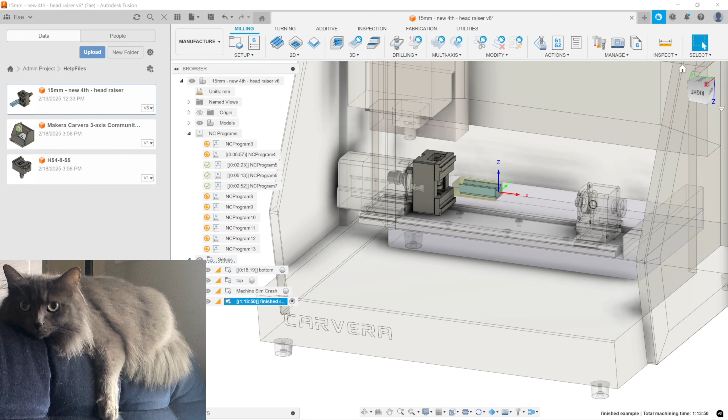So what we have going on today is one of the community members, Serge, who goes by the moniker Pew Pew Lasers on the Discord page, sent in a file with a fourth axis where they want to do a tool flip in the middle of it, and they wanted me to look at it and see if there's anything I could do to work through the file, give any notes, hints, tips, tricks. So I'm going to walk through this file start to finish, how I would potentially approach it, and go from there. Just maybe a little bit of background.

So the vise you see is this self-aligning vise. It's not the normal four-jaw chuck. And this is quite literally the first part I'm making using this vise. I made the adapter plate a couple weeks back. But the thinking I had was that this would enable the ability to do flip parts in, I guess, any material really quite easily with the fourth axis because it's center aligned. But in the process of putting this together, I realized there's a lot more caveats involved than I expected.

One of the things that worries me the most is how to work out the clearance between the vise and the spindle and all that part. I'm happy to have any kind of help on this one.

Talking about trying to figure out how to deal with a file where you want to know whether or not you're going to hit the vise. So I'm going to quickly simulate the file that I was sent and step through real quick.

So if Serge was working with a Carvera with the laser attachment, you can see all of these red areas, it would smash directly into them, which is not great. Luckily, Serge is not working with the laser attached, so I quickly added a second simulation file that has the laser removed.

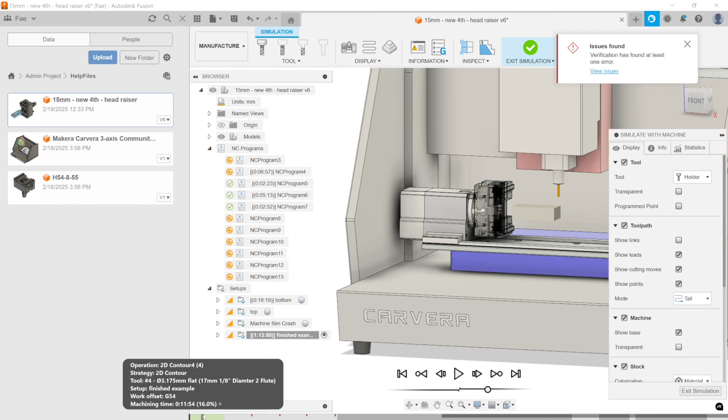And I will walk through exactly how to do that when I do the setup. But inside of here, you can see it still has a few areas where it could potentially crash, but we can fix those as time goes on.

So the first thing I'm going to talk through is I know that there is a crash happening. And the way I would potentially fix that crash is by taking the stock a little bit further away from the chuck. You could also fix it by using a slightly longer tool and a few different other ways.

So if I go into the design workspace, Serge has got this setup where there's the chuck and there's the part. So I'm going to part with the chuck and just pull it another 10 millimeters away. And I can check how long the part will need to be by clicking the inspect button and grabbing two sides. So it looks like you'd be looking for something around 87 to 90 millimeters of part with stick out.

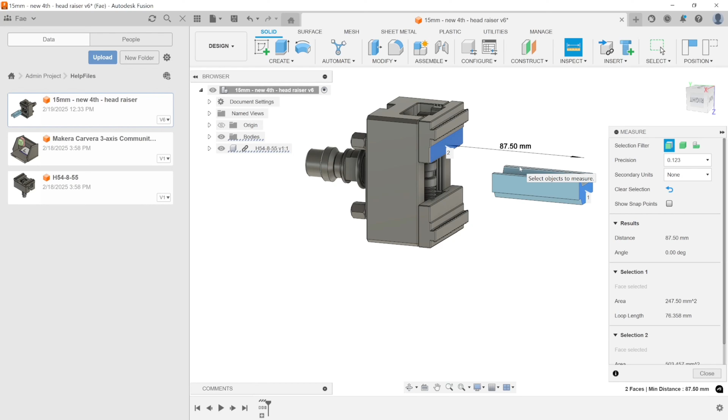Right. As you go through this, you would verify it a few different times with the machine simulation. So if I go back into the manufacture tab, regenerate the toolpath real quick.

I'm curious to hear your thoughts on where the optimal WCS, the work coordinate system, should be. Do you agree with using the most furthest point, or should I maybe use the chuck as the WCS origin?

So long as your part is at least as long as the piece that's in Fusion, it's probably better to use the end of the part just because it's easily accessible. Though it doesn't really matter so long as you set it up the same between Fusion and your machine.

So what we're talking about is in the setup, there's this work coordinate system here. That could have been anywhere along. So I'll talk through those as I do a new machine setup. Real quick, showing the simulate with machine.

Running through the entire simulation right now of the toolpaths that I had generated earlier. Shows me that there aren't any collisions. There's no little red nicks on the bottom bar. And the verification issues, no issues found, has shown up at the top, meaning I can be pretty confident.

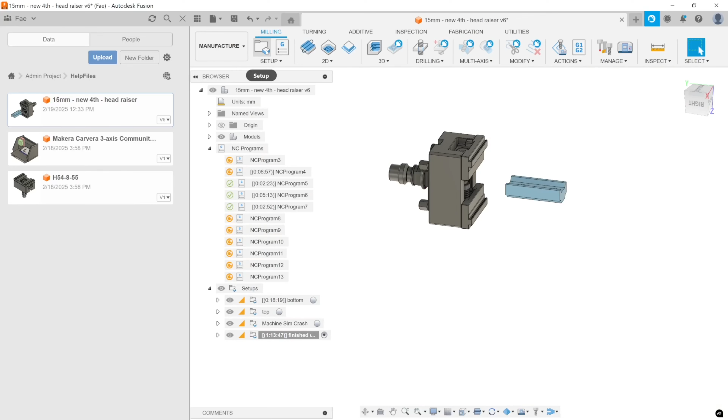Did you need to do anything special for the simulation to know that hitting the chuck would be a problem, or is that what you're about to show? We're going to walk through doing the setup from scratch. All right, so in the Manufacture tab, creating a new setup.

The machine is going to be the Carvera 4th axis harmonic community, no laser version. This is the version that I created that doesn't have the laser module attached. The operation is milling. For the work coordinate system.

I'm going to choose my work coordinate as z-axis and x-axis. So the first thing I select is my z-axis plane, which is any flat face to get the z-axis going up. Then I'm going to choose my x-axis. I want that going through the center of the part, so anywhere there's a line parallel to the center of the part, click on that line. You can see the x-axis is going through the part, but it is reversed.

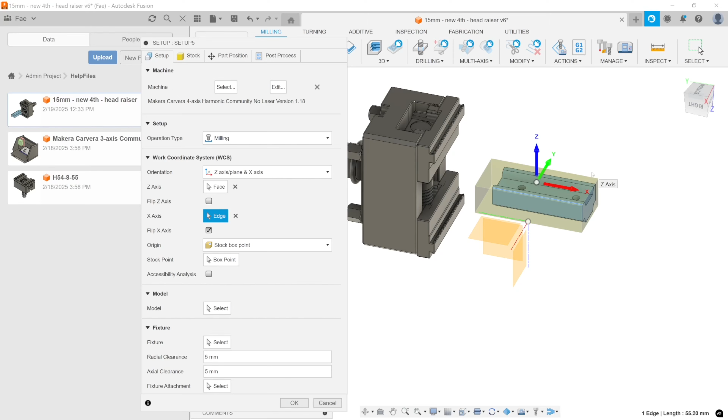So I'm going to flip the x-axis. Now I've got my coordinates correct: z-axis is up, y-axis is away from me, and x-axis is through the center of the part. Anytime you're doing 4th axis work, this is the setup you want to do. That way you can touch off on the top of the spindle like you would normally do with a 4th axis part, and the Z height will be correct.

Then we need to choose an origin point. Coming down to the origin section, you choose model origin, selected point, model box point, or stock box point. I'm going to start with stock box point and select. So I could choose the center of the part along this axis. I know from earlier in the setup in the design document that that center point is the central axis of the chuck and the central axis of the A-axis.

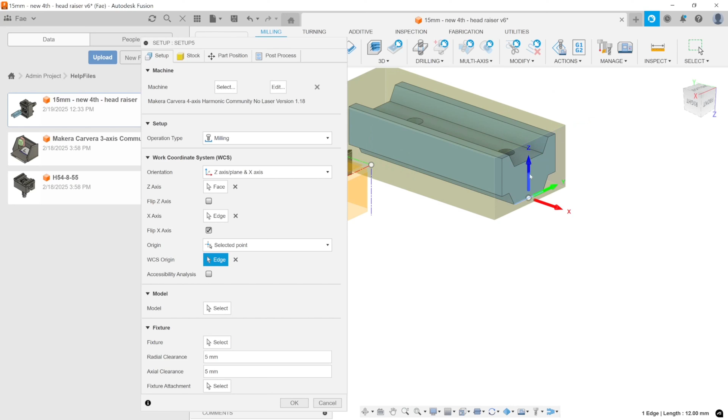However, if it weren't there, I could choose various different options. I could choose a model box point, which is on the physical object, any of the model pieces. So again, I could choose a center point right there, which is a center of all of the 3D files that I've got open right now. Or I could go to selected point, which gives me flexibility to put my origin anywhere. So if I were not doing a 4th axis part, I could put the origin on any of these faces, centering on faces, and so on and so forth.

Or I could set it up on this axis here. Or, if I were to ignore the warnings here, I'm going to go back into the Design tab and create a sketch on that face. I'm going to capture the position of the things I was doing earlier. So I've got a sketch here.

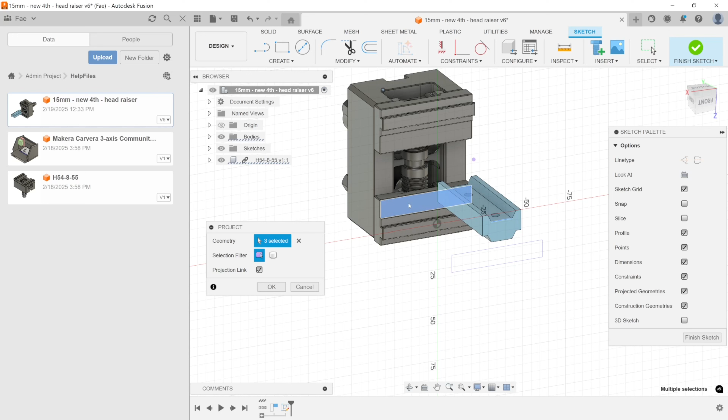I could project any of the geometry I want. Say I wanted to line up my origin with this top face here, I could project any point on that top face. Project is the P key. Then I could project this center line here. Don't want to select that. So then, if I grab a line from the midpoint up and constrain horizontal from that point to that point, now I know this is the central axis of that part, the end of the part at the height of the top of my vise.

Not super useful when you're doing a 4th axis part, but useful if you're doing a 3-axis part, say you're doing it inside a collet chuck or inside a vise. This allows you to manipulate exactly where that origin point is going to show up. So I have it drawn out in my sketch. I go to the Manufacture tab, back into my setup, and I could select my WCS origin as that point right there. That's cool.

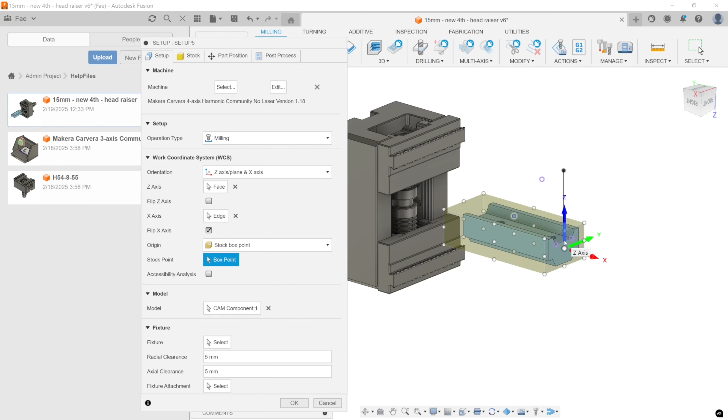It's a bit of an open-ended question. Could you imagine a scenario where you would want to do three-axis milling, but while the stock is held in the chuck in the rotary module? If you needed to pick up a specific feature on your fourth axis part that already existed as a Z0, so yeah.

Say I was milling on this face and the important part of what I was milling was in relation to that face. So I don't really care about the distance from the center line to the face. I care about the distance between this bottom face here and this top face here.

Then I would choose to do that style of three-axis milling.

Anytime you're doing work coordinate system points, those are what are called a datum. It's what you want to base all of your other measurements off of, and where accuracy matters from.

So in this particular case, if you had already milled these two central bore axes, you might choose to create a sketch that puts a point in the center of this bore along the central axis of the fourth axis, so that you could pick up on that bore using a three-axis probe, and then everything else would be based off of that.

It sounds like it would be really useful if you're modifying something that you didn't design yourself. Yeah, awesome. Thanks. That's actually the kind of project that I'm most likely to work on.

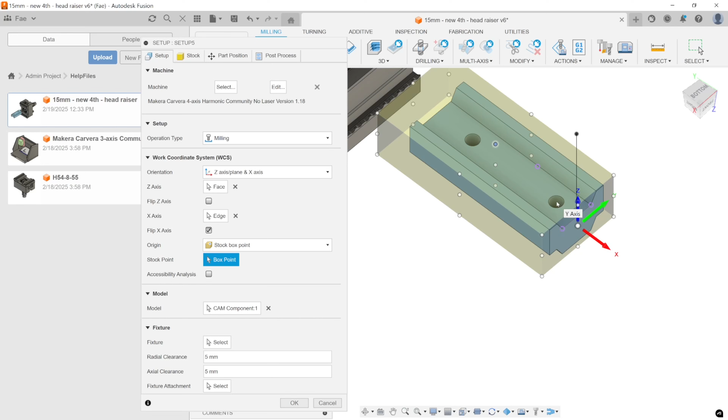Sweet. So we've chosen a point. I'm going to choose my model as just the model that I have out in the world right now. And to make sure that the simulation pays attention to the chuck, I'm going to set the chuck as a fixture.

That allows me to do some things like add some clearance to the fixture. So if I want to always stay 5 millimeters away from the chuck, or if I want to be super safe, say 10 millimeters away, I can add that information into this radial clearance or axial clearance, and that'll give me that information. So if I just select the parts of the chuck that matter, now when I do a machine simulation, it'll tell me if it hits that.

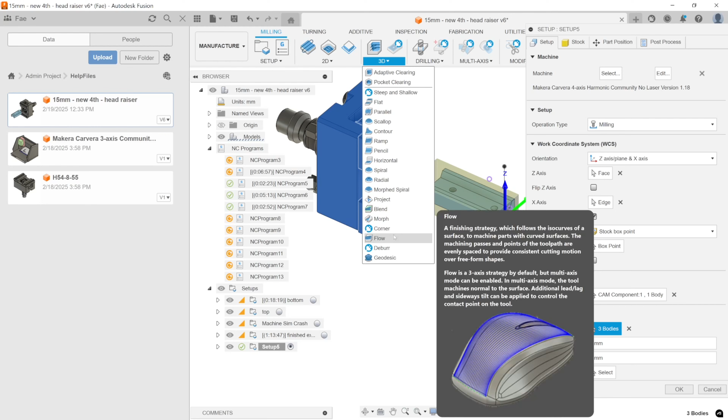And obviously, maybe not obvious, but does it know about hitting the machine itself? Like in the machine sim, there's that 3D representation of the Carvera. You would highlight that in red as well, right? Yeah, if in the machine simulation, anything in the fixture section, if it hits it, it will highlight it. But the 3D sections here, any of these model aware operations, won't try to mill what the vise is.

So if you had both the vise and the part in the model section, and you did a 3D adaptive clearing, and your stock covered both of them, then it would try to mill out this pocket in the vise, which it shouldn't do. So use fixtures for things that you don't want to mill into but still want to test if you're going to hit, and use models for the things you actually want to mill.

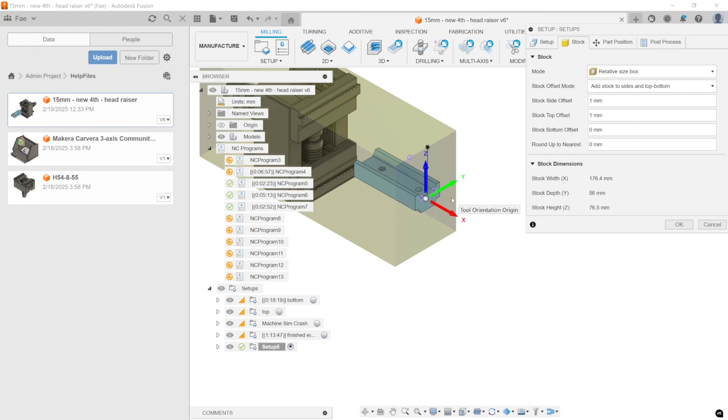Inside of stock, you had sent me some information about the piece of stock you were planning on using. But if you hadn't, you could use any type of stock, fixed size stock or relative size stock. I generally like using fixed size stock for anything where I know I've got a physical object I'm going to be machining out of. If I don't know what I'm going to be machining out of, I'll probably use relative size stock. So if I was cutting a small part out of a large sheet, I'd start off in relative size stock and say...

Oh, why are you doing that? Sorry, one second. There we go. I had clicked the wrong thing — if you saw the stock was covering the vise as well, I had clicked the wrong thing when I was in model. I had accidentally set it to everything instead of just the piece we're working on.

So if I'm not really sure what's going on, I'll often start with relative size stock and add stock to the sides, say 15 millimeters on each end, however I want to do it, and then switch back to fixed size. I'll take note of the measurements and switch back to fixed size stock. I just find fixed size stock is a little bit more robust over model changes, so I don't get into a situation where I change something in the model and suddenly things are different.

So you sent me some information which you had set up in the previous setup. I actually always thought 'preceding setup' would also consider what milling operations have been done in the preceding setup, but it doesn't seem to do that.

It just takes a side, right? That is this button right here, Continue Rest Machining. We'll do this when we go to side 2, so I can show you. It depends on exactly what I'm doing. If I'm going to use Continue Rest Machining, frequently I won't, just because it adds a bunch of extra processing time. But it's good to have for things like milling all 4 sides of something—Continue Rest Machining is super useful.

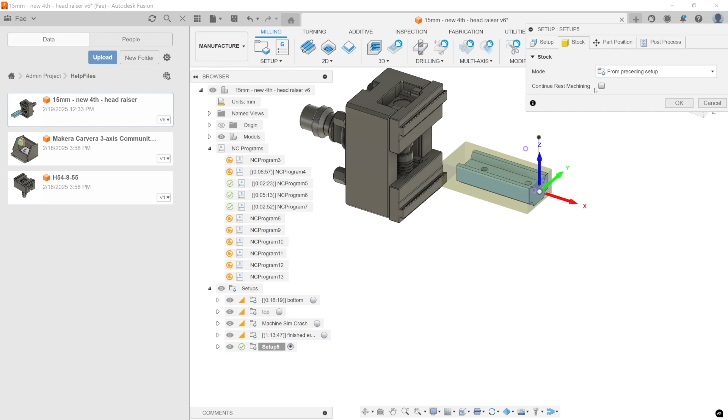Yeah, in this particular case, you want this side of the stock that's going into the vice jaws to be relatively square, just so that it sticks out and isn't terribly angled. However, with what you're doing with this piece, you've got a lot of leeway on either side that can be cut down.

So you can be less accurate with parts if you're going to work on them from scratch and remove the face. If you're going to remove parts from all 4 faces of the model, there's not really a reason to spend a lot of time facing the stock beforehand, because you'll end up refacing it once it's in the 4th axis.

To me, this is another really strong argument for doing flip parts or smallish parts like this in the fourth axis, now that it can hold the torque. You don't need to prepare the stock basically—as long as it's straight enough, just chuck it in.

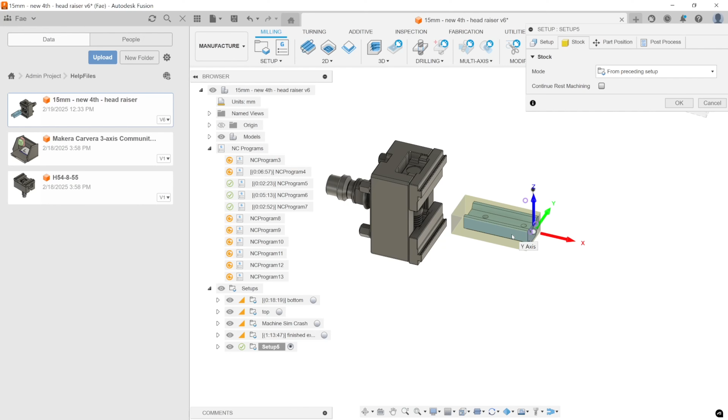Yeah, correct. All right, let's set up some machine simulation real quick. Since we are using one of the files from the Carvera Community profiles—I'll put a link into the chat and into the description of the video—but since we're using one of these profiles, we're already set up for machine simulation. So all of the work required to set up machine simulation is done for us.

The machine is ready to go. It has all of the pieces move correctly. The only thing we have to do is tell the machine simulation where our part is in relation to the machine.

In that case, I know that in my machine sim for 4th axis, the part position is the center of that chuck. So I'm going to switch this to part attachment selected point, and grab something that is already on that x-axis. I know this chuck has a central piece right here already on the x-axis, so I already know it's going to spin around that point.

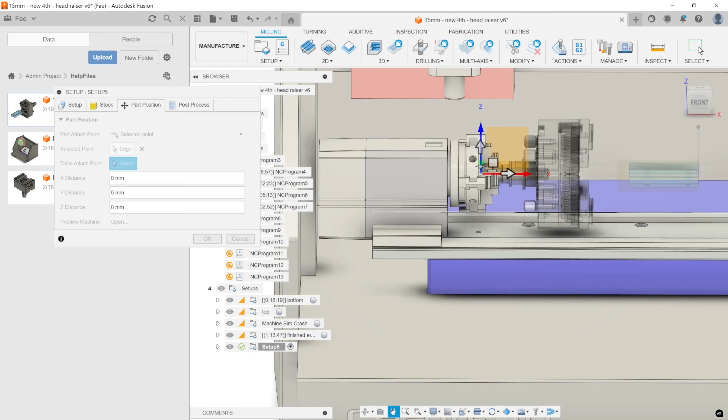Then I can drag it back and offset it away from the chuck however far I need to go. I'm not going to bother removing the chuck that's already on there—it's just more of a visual thing than anything that the chuck is there. So I've got my part in position, it's got its preview machine set up, and I have a part in the chuck. Hit OK.

And we have our setup. The stock is floating a little bit to the right. That's because you changed the stock size, or is that correct? The stock is floating off a bit to the right because I didn't modify the stock size to go all the way to the vice jaws.

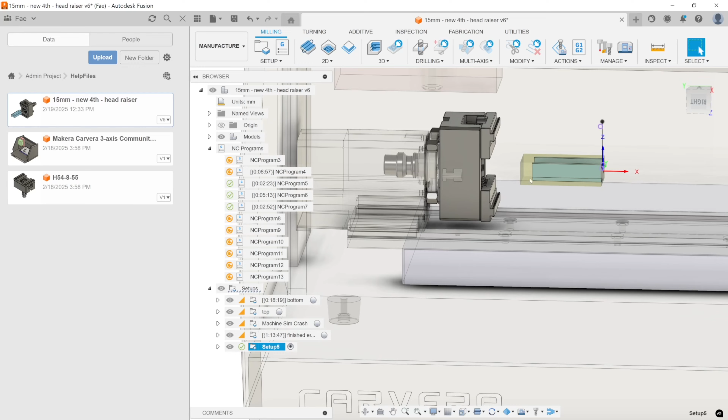Yep, that is more of a personal choice. I made the decision that I don't necessarily need to make the piece of stock go all the way into the vice jaws, since I'm only cutting this section of it.

Gotcha. And then I can test how long it should be, again with the inspect, grab the face it touches. It's about 95 millimeters apart, so on and so forth.

So first up, when we're working on a part, generally you want to rough and then finish. So we're going to start with some roughing operations. For visual clarity, I'm going to turn off this sketch real quick, and also get rid of that. Yeah, that's much better.

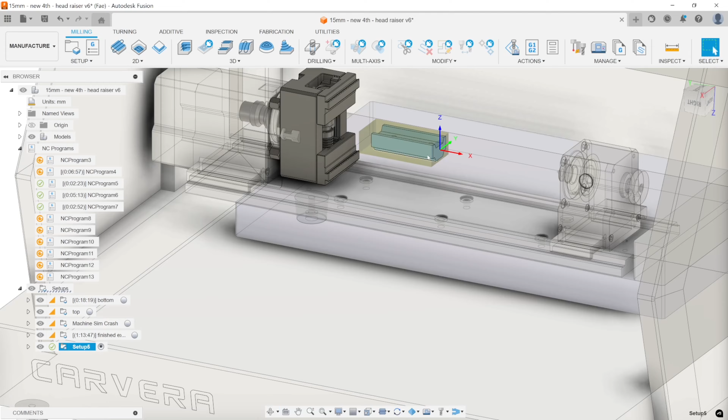A little bit more room to play around in. So as we're working, I like to generally use some form of adaptive clearing for most of my roughing operations, and there's a couple of ways we can go about this.

First thing you probably want to consider, or first thing you do when you do any roughing operation, is I'm going to start with an adaptive clearing. So I'm going to click the adaptive clearing, make sure my tool is correct—the tool you're using and sent was a 17 millimeter. It's the DLC coated 3 flute, correct? Yeah, it's 3 flute even though it says 2 flute. Yeah, so I'll go in and double click that.

I'm going to switch it to the feeds and speeds preset that you had created for deep aluminum. I'll walk through all of this in a second, but once you create a toolpath for the first time, the best thing to do is just hit OK, and that puts it into your setups.

And you chose 3D adaptive here. Is there a reason why you did that instead of 2D adaptive, or is that a personal preference or something? Yeah, so choosing which of these two I wanted to go with...

So I have a model where I've got some slanted sides. I want to create a little staircase section on the slanted sides so I can finish it later. I also want to rough the top of these faces here, and there's a lot of operations I want to get done at once.

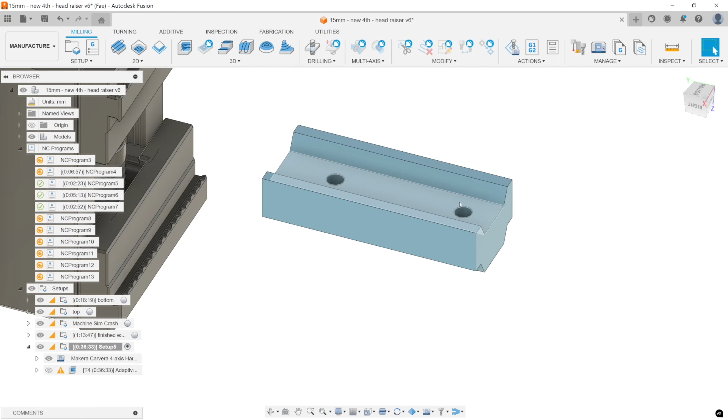I could go through and create 2D adaptive clearings for each of those operations. So I could do a 2D adaptive on this area here to clear out the center, and I could do another one to clear off the tops of these. But 2D adaptive doesn't really understand sloped surfaces, and there's some things I want to do with those sloped surfaces.

Awesome, that was going to be my next question—like a sloped surface and the cylindrical tool, how do you handle that? Yeah, so if we go back to what you had sent me, this is an example of if you were to do the 2D adaptive, and then your next toolpath, you see there's a varying amount of material being taken off across the entire surface.

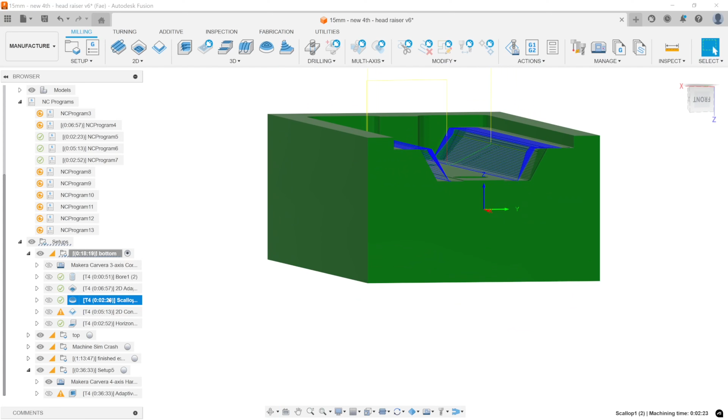So if I step here and then here, I'll simulate this real quick. If you had done a 2D adaptive, you step through and you can see it's got light cuts when it's at the top and heavy cuts when it's at the bottom for a finishing operation. You want to avoid taking heavy cuts when you're doing a finishing operation, and you want to avoid cuts that are inconsistent.

So you want to get as close to the same width of cut, width of material, on both the XY plane and the Z plane when you're doing a finishing operation. I'll go over that a bit more as we step through.

So in this particular case, I chose a 3D adaptive. I hit OK—this is a hot mess. I'm going to start refining this toolpath. But since I had already set it up and hit OK, I can just go back and forth with OK. I can go in, edit something, hit OK, see it, and if I don't like it, hit Control Z.

Whereas if I had gone into a 3D adaptive, and then went through, grabbed this, came into here, did a bunch of stuff in here, came into the linking tab, did a bunch of stuff in here, and accidentally hit escape, all of the work I had done before I hit escape would be completely lost. So it's always good to make the toolpath, hit OK, and then go in and edit it—you can edit it in steps.

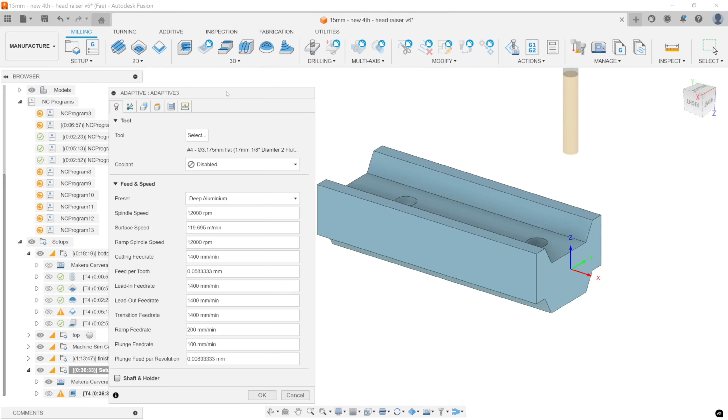I thought about this as well, and I can show how to do that. Don't you need the Fusion subscription to be able to do tool orientation? That's a paid feature you don't get on the free edition. You are required to use tool orientation to do it in the same setup, but I'll show you how to do it in a different setup, so you don't have to use the paid feature. I'll show you two ways: one vertical way, and a more complicated way that doesn't use the paid version. I can also show you a third way that does use the paid version, though it's not really much different from the free version.

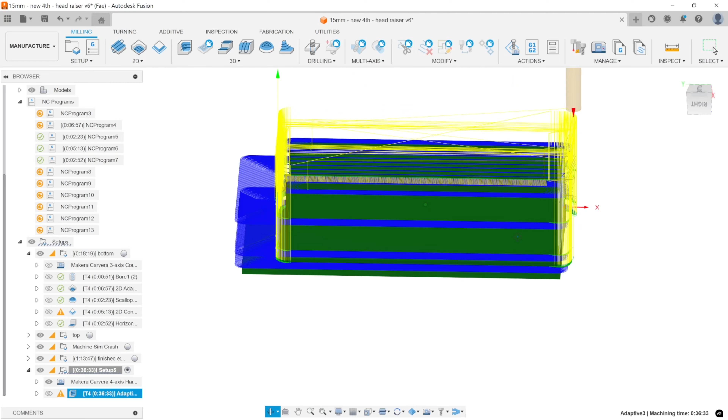All right, there was another question about heavy cuts in the simulation. No, not in the simulation - in the toolpath preview. I believe blue is just normal toolpaths, and yellow is like rapid moves. In this preview, blue means the tool is in the part and cutting. Yellow is a transitional move - you can see it going up and then over, and anytime it's touching the part, it's blue. Red is a linking move, usually a helix linking move or a ramp linking move.

If I set this up real quick, you can see the red showing a ramp into the piece. Fusion doesn't have a good way of showing how wide of a cut is being taken. Green is also a transition, but it's another type of linking move - green is what's called a lead-in or lead-out. If I go to the linking tab, there's a leads and transitions section - that's what these moves are. So it's either right when it's entering the piece, or right when it's leaving the piece to go into one of the yellow rapid moves.

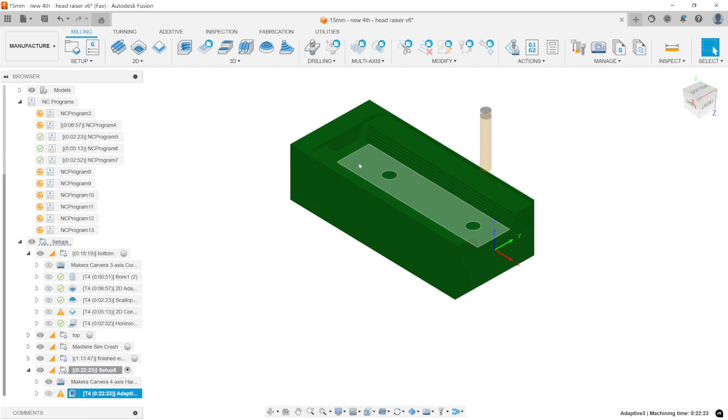So I've got a setup here, and I'm going to do a few things to it. First off, I'm going to hit F7, which hides the toolpath preview I've got going. Any visibility things you want to play around with are in the bottom section - there's all sorts of different options. You can turn on and off linking moves, so you can see yellow, green for lead-ins, and blue for cutting moves, plus a bunch more information. It's also on a hotkey, F7, to turn it on and off. It's nice to see what the in-process stock looks like, though I wouldn't trust this green version for your final representation - I always simulate to see what the final look actually looks like.

All right, let's start walking into these parts. Opening this up, the feeds and speeds - let's test this real quick. Yeah, these are the feeds and speeds you sent with the original file. I'm not as familiar with this tool, and it seems like you've been having pretty good luck with them, right? To be honest, I think I've tweaked a lot of that since putting in the motor controller, so we can just ignore the feeds and speeds for now, I suppose.

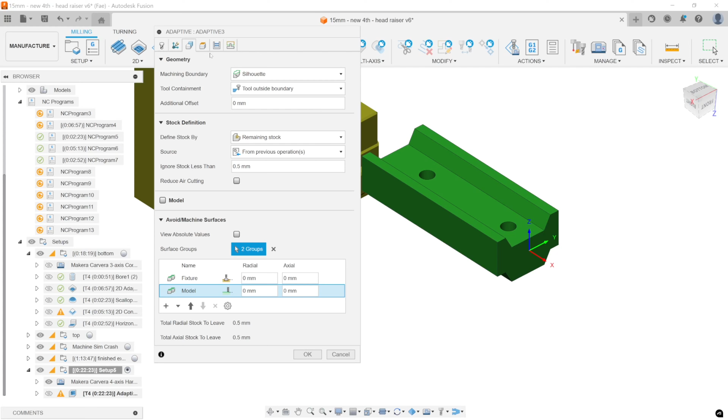Cool, then I'm just going to talk about toolpath generation for right now, and you can go back and modify feeds and speeds as you get more used to it. In my part, I'm going to jump into the Geometry tab. If you were in the 2D area, this is where you'd decide you want to cut this section of the part. In the 3D section, instead, with 2D you want to cut out a specific pocket - 3D is you want to cut out this area of the part. 3D is defining what you're not cutting, while 2D is defining exactly what you are cutting. 3D is a lot more automatic and can do more powerful things, but frequently you'll go back to 2D for things where you really need specificity, like one specific thing in a particular toolpath.

Awesome, so stepping through this, in the geometry section I'm going to choose a machining boundary. If I set this to none, it'll cut all of the stock - anywhere there's stock, it'll cut. If I instead set it to bounding box, it'll look at my model from the direction the cutter's looking at it and draw a rectangle around it.

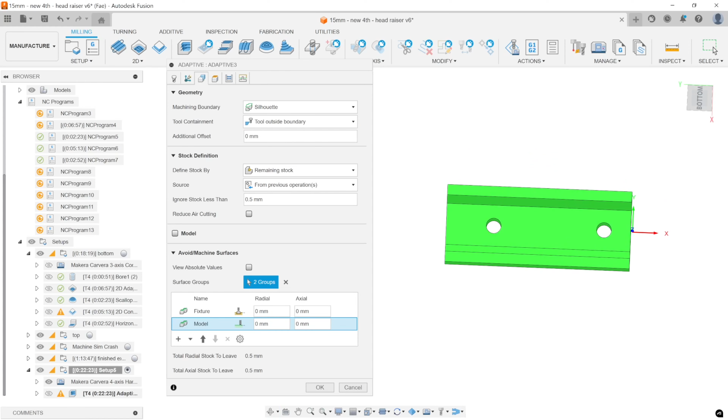I'm going to choose silhouette for this. The next section is how far outside of that silhouette do you want to go. The tool has dimensions itself. So if it's tool outside boundary, the tool will be able to go outside of that silhouette you've generated. Tool center on boundary, which is what it defaults to, and tool inside boundary are three different ways of defining exactly where the tool can and cannot go.

In this particular instance, I'm going to choose tool outside boundary. And because I've been doing a little bit of playing with the file, I'm going to add a little bit of extra offset. I'm doing that so that when I'm machining this face here, I go a little bit past it for the finishing operation, so that the finishing operation, when it gets to the end of the part, doesn't just plow into something. I'll show you that here in a second.

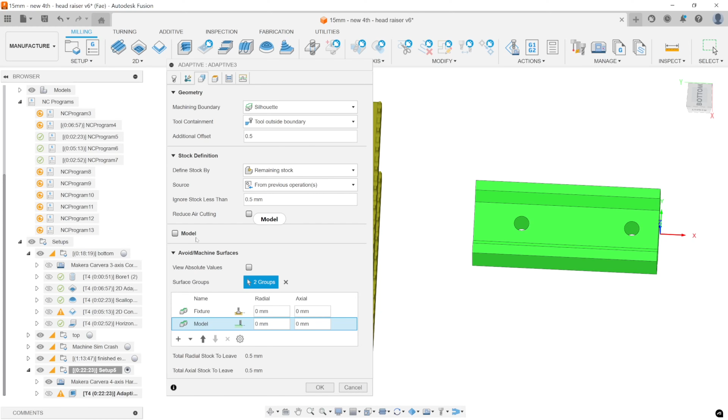Stock definition is all fine, since we don't have any operations before this. And that's good. There's some advanced things you can do with the avoid and machine surfaces, I'm not going to go over that right now. And there's some advanced things you could do with the model section, which I'm also not going to go over right now.

Next tab to jump into as we're walking through, I'm going to hit OK real quick so it saves all of the things I was just doing. It'll recalculate, but while it's recalculating, I can just double click it to cancel that recalculation.

Is the heights tab. This is telling it where do you want to cut from to on the z-axis. In this particular case, I don't want to cut below this face here because I want to create a tab on the left side. So instead of choosing model bottom for the bottom height, I'm going to switch this to selection and select that face.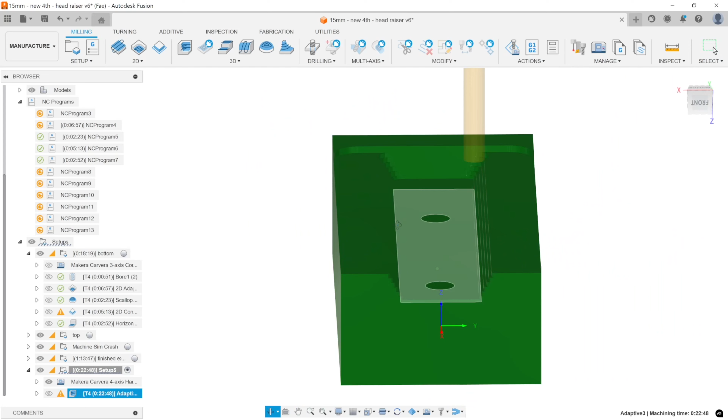I'm going to simulate this real quick just so you can see what's happening with that, or allow it to regenerate the toolpath. So if I pop out of F7 here, you can see I'm going past the part, but I'm leaving this little area here because I'm going to create a horizontal tab in the part right on this section. So I didn't want to get rid of that area. You can also see that I've gone past - let me turn the stock on and off. My part ends here and I go a little bit past it. This allows me when I'm doing the finishing operation to have a more consistent tool engagement. I can go off the surface.

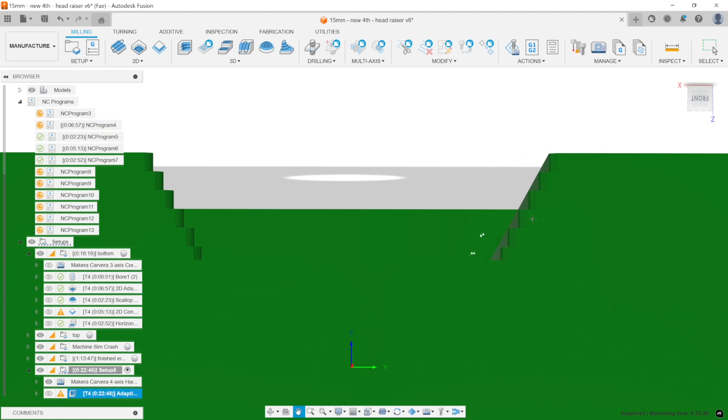And then the other advantage of the 3D toolpath is I have these stair steps, which is a much more consistent way of cutting when I do the finishing pass than if I were doing the earlier version where it was just cutting all the way up to the top surface when it was at the bottom. So it was cutting 6 millimeters when it was at the bottom and it was cutting 0.5 millimeter when it was at the top. Now when it's cutting the finishing toolpath, it's only cutting 0.5 millimeter every time it goes up. We can adjust that in the next tab. So right now this takes 22 minutes. In the passes tab,

We can adjust some things. You have your optimal load, which is your step over.

Cutting radius, machine cavities, setting it to climb, roughing step down of 7, and then the fine step down. This is where you choose how big of stair steps it's making on those vertical surfaces. So if I were to switch this to 2 and hit OK, it should simulate a little bit faster, much faster. So now it's much bigger stair steps, but it went from 22 minutes to 6 minutes in the little timer that I've got here.

If you haven't seen how that timer works, go into your profile, preferences, manufacture, show operation machining time, and that will turn on your little timers down here.

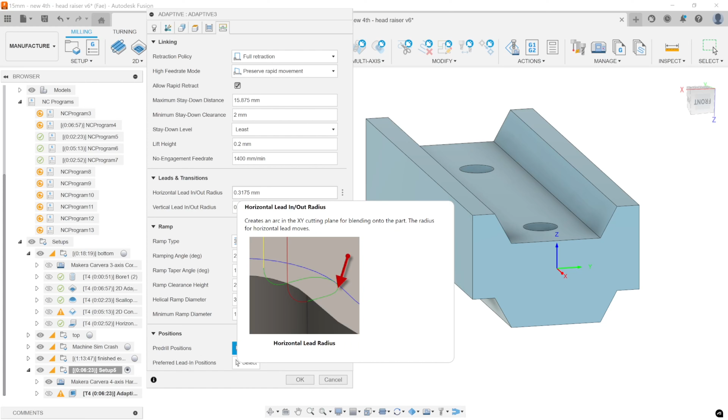Last up is the linking tab, and inside of here, the defaults are all fine. If you hover over any of them, it'll give you a little bit more of a breakdown. If anybody has any questions about any of them later on in the video, let me know — I'll be going over some of these features in different toolpaths as we go along.

So I hit OK, and it's going to generate my first toolpath. And there we go — going off the edge here, going off the edge here. If I do a quick simulate, it starts off the piece of stock, runs through the center of the stock, and then does the edges and the top.

Sorry, there was a question in chat: how do you decide how much retraction you need? Speedkill says they notice it appears to be a much larger default than is needed. Yeah, I think 5mm is default, which probably makes sense on a much larger VMC or larger mill than the Carvera. If I'm really optimizing something, I kind of change that to 1mm.

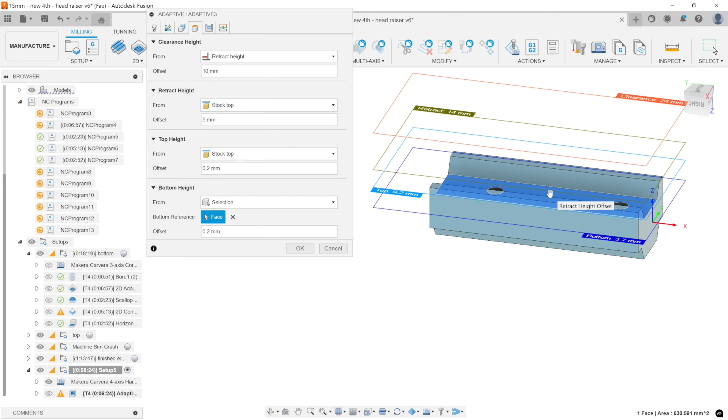Does it matter? If you're not confident in the part and you're okay sacrificing machining time for safety, leaving it at the default is great. If you're more confident in the part, and you know the top surface is already flat and the stock you're using isn't significantly taller than the stock you had set up in Fusion — if the stock in Fusion matches the stock you're actually putting into the machine — then you can go as low as 0.5 millimeter.

0.5 millimeter from stock top is about as far down as I would go on the first operation. Once you get into later operations where you've already milled away parts of it, you can get a bit more aggressive. In this particular part, my first roughing operation touches every top surface. Theoretically, when I'm done with this first operation, anywhere along the top is already cleared and no longer there to hit. So in my first operation, I might leave my retracts a little higher, 2-3 millimeters. But later, since I've verified that stock is gone in subsequent operations, I can reduce it.

That might be something to keep in mind if you're not preparing the stock yourself - it depends on the manufacturer. Same thing in the linking tab. We're not using a ramp here because we have the end of the part to work with, but if we were using a helix ramp, the ramp clearance height - if it's rough stock at the top, I'm going to leave that relatively high. But in the next operation, I'll show you bringing that down significantly.

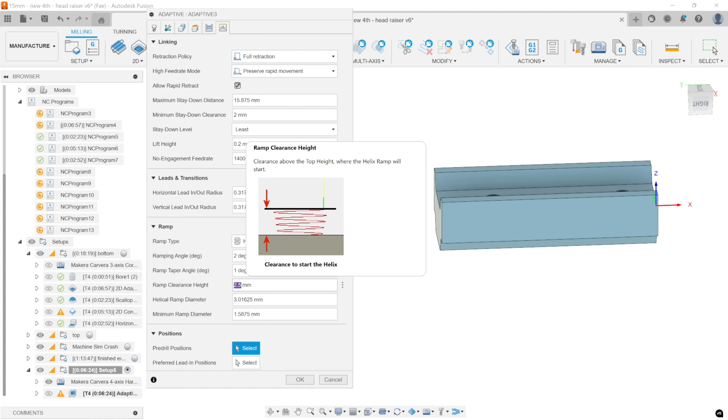So if I know I've already machined a surface and I'm just starting on this bore - actually let's do that. I've done op 1, let's do op 2. I'm going to do these bores real quick. I'll do a 2D bore operation, grab those two faces. Same tool, same speeds and feeds. Grab a bore operation, I've set it up, hit OK. Open it back up, that just makes sure it's saved.

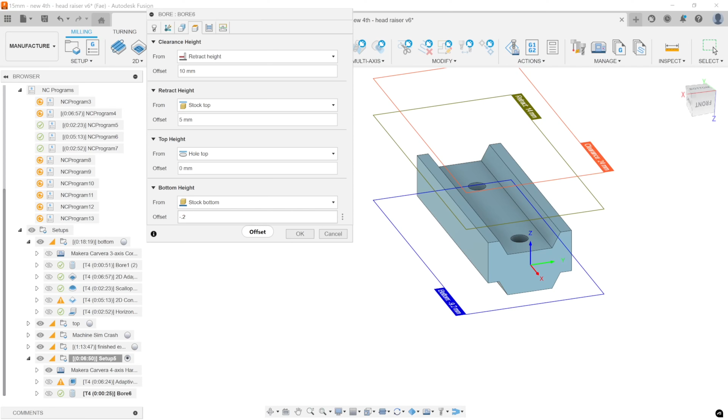So if I flip over the part, from one side I've punched that all the way through. This helps with any type of misalignment that might happen. If you need to flip the part and pick up something on the other side, it's good that you already have the bore. You could probe one bore, probe the other bore, make sure they're parallel. You could put a couple of pins in the bores, put a parallel against the two pins, and sweep it with an indicator to make sure those pins are parallel to your x-axis. There's a lot of useful things to having a feature transferred from one side to the other.

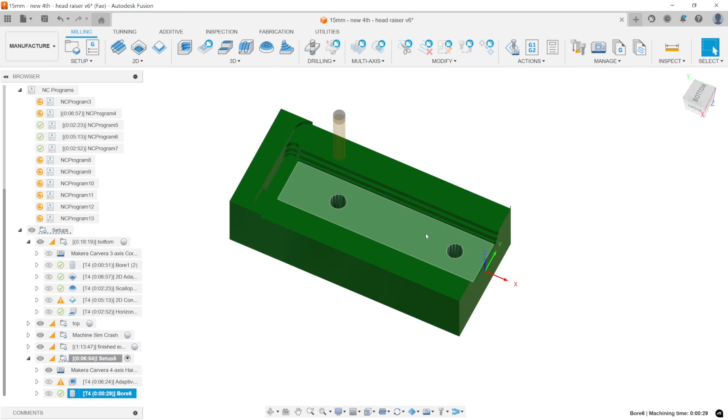It also leaves the bores much cleaner in this particular instance, since anytime you flip a part over there'll be a little bit of a ghost change in the tool cutting. So if you do the bore and flip it over, where those two bores meet, there'll be just a tiny visual step no matter what you do. If you do it from the same side, there won't be that step. You need to determine where that matters and where it doesn't. In this case, you can punch them all the way through - you might as well.

Going back into the heights tab - the hole top is fine. Since we already did this adaptive clear, I know this whole U-shaped section is already cut out. So I can start at the top of the hole and mill to the bottom. If I had not done the adaptive clear first and wanted to mill these two holes, I would choose stock top instead of hole top. So if I were to reverse this order and do the bore first...

As far as, in that process of roughing, maybe finishing, where would you normally do a bore? Because it seems like you can nearly do it - like you don't need to do any finishing operations on it, right? It's normally quite accurate, depending on how accurate you need the bore to be.

In this case, I suspect these bores are clearance bores for a piece of hardware - which means they can be done at any time. If these were bores that required me to put a pin in them, and that pin has to fit exactly, or I needed to press fit a pin into them, then I would do them in two operations: one is roughing the bore, and one is finishing the bore. That way I can tune the finishing to whatever I need it to be.

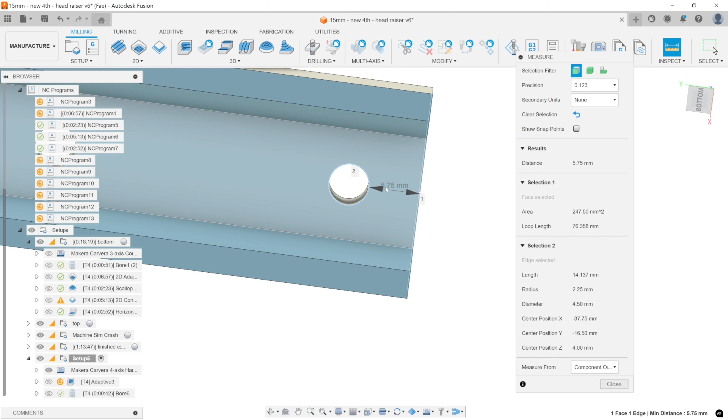Easy. Yeah, the inspect tool is super powerful. You can also grab a circle and it'll tell you what your radius and diameter are. You can grab a bore and it'll tell you all sorts of different information. You can set it to show you inches if you care about inches, or if you're working in inches and you want to see millimeters at the same time. You can also grab any two faces and you can see from that point to that point is 5 3/4 millimeters.

Awesome. So in the bore, again, we're skipping over feeds and speeds because you've got a bit stronger of a grasp on this particular mill. So we've done geometry, we've done heights. Coming to the passes tab,

we're doing a bore, so we want to make sure we use a ramp angle. I like tuning down ramp angles a little bit when I'm using aluminum, between 1.2 and 1.7 degrees. It just gives it a little bit nicer of an entry and doesn't lose a lot of extra time. If you're noticing that it's cutting really happy at 1.5 degrees, it might be worth upping it for the different parts that you're using. Some end mills will do up to 2 degrees, some end mills will do 3 degrees.

This is me being conservative. Me being conservative is 1.2 degrees, and then if I know the mill and I know how it operates, I'll bump that up until it starts being mad at me, which is if it's starting to really slow down the motor.

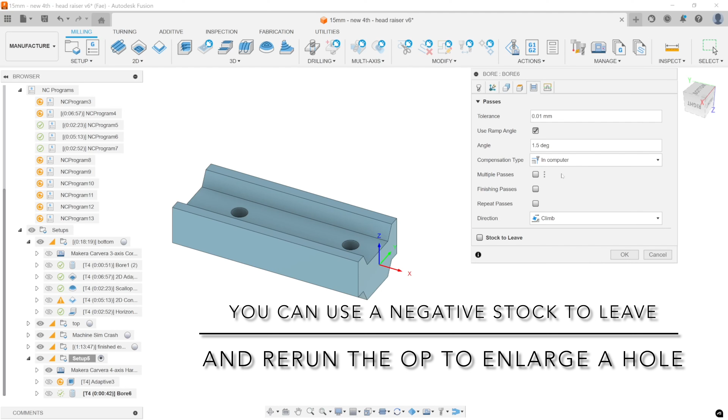Amazing. In this case, if I were doing a bore and I needed it to be more accurate and I needed to do a finish pass, you'd set the stock to leave to an amount, 0.1 millimeters is fine, and then you finish the bore in a second operation without stock to leave. But this is a clearance hole. The tolerances on the hole aren't super critical. It's large enough. Hit OK, and it jumps through and does the bore.

So we've done a couple of operations. This is sort of how you were setting up your file. There are a couple of operations you could consider. In this particular object, I know from how you've been setting it up that the sides and the front face don't seem terribly important as you were working through them. If they were, I would suggest going in and doing a 2D contour.

With an open chain to get like a U shape. Same tool, grab a chain, grab open chain. I'm going to select that edge and that edge to get the U shape. See, it's going around three of the sides, but not all of the sides. I'm going to hit OK on that. You can see it's making our U shape.

And then the heights, I'm going to do the height to selection, and select this bottom face here. And in this particular instance, you don't have the flute length to go all the way through. So instead, I'm going to go a little bit beneath this surface so that it's ready for finishing, and you could chamfer, but not all the way. So when you flip it, there will be a small step visible between those two.

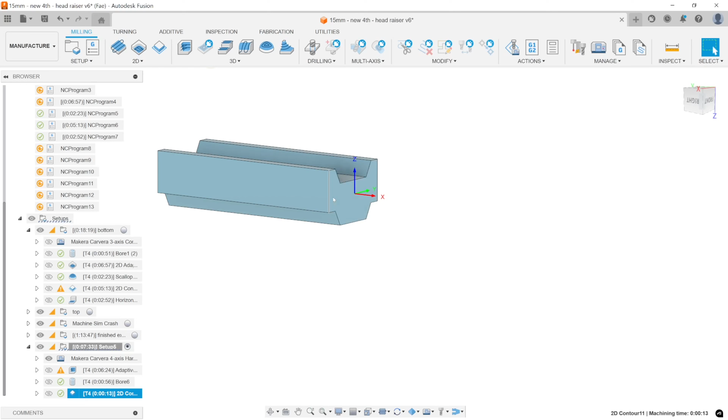Why are you being weird? There we go. So if we go into our 2D contour, when you are done finishing this part, there will be a small step, come here.

Okay, the lighting's being a bit weird. There'll be a small step between where the other side matches this side, but it's the outside of the part. You can burnish that away with some sandpaper and no one will be any wiser.

Really, what you're doing is you want to make sure that the important faces, which are this bottom face here, yeah, your important faces are these faces here. Everything else can be a little bit less accurate.

I think subsequent to sending you the file, what I found was I could do stock to leave on the outside on the first side, and then when I flip it over, there's enough flute length to do a finishing pass on the outside, doing that same kind of open chain, I think it's called. But there's just not enough flute length to do it all while it's got the full amount of stock.

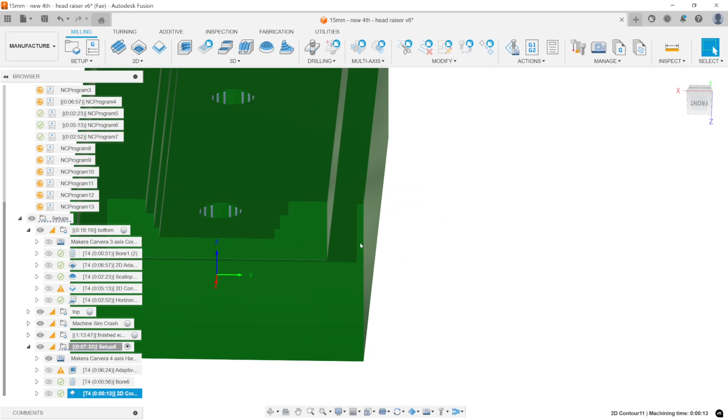A way to avoid that is you could go into the passes tab, turn on roughing passes, and have some step over. Should be 3.5, and then go into the linking tab and have a 1.5 degree ramp. This will take quite a while though.

And this is a good idea anyway, right? Because if you only did one, then the tool is touching both sides of the slot, which is not a happy place for the tool. It's nice to do a step over using the roughing passes because the first one that will happen is the one further away from the part, and that one will be touching both sides if it's a slot.

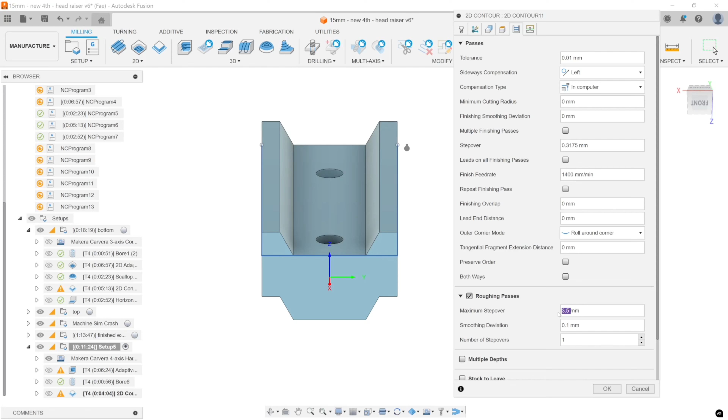But if it's not a slot, it won't be touching both sides. So I increased it a little bit more. I'd have to play with this for a little bit to get the exact value that you need to get rid of those sides. However, I have a different suggestion for how to clean up the sides of the part.

Instead of doing it in 2 operations, one from the top, one from the bottom, doing it in 4 operations where you do one from the top, one from the bottom, and then you just go through and clean up the 2 different sides as their own operations would give you a much better surface finish on these faces.

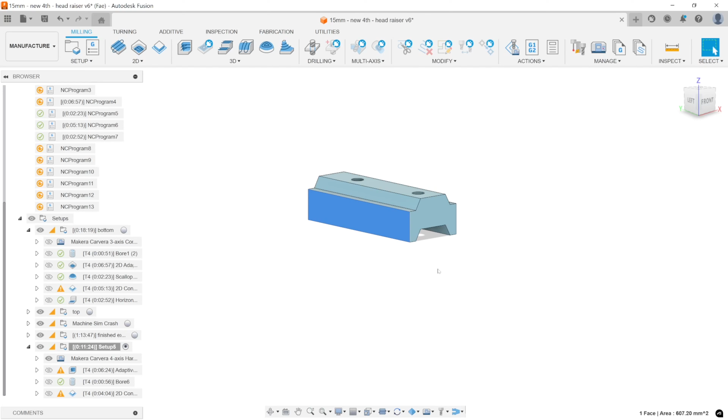And also be much quicker. The ramping down into the stock with the side of the end mill can take quite a bit of time. Yeah, that's because I think in the file that I have now on my computer, it's like 20 minutes just to do this U operation.

Since those then are just cleaning up a singular face, I'm not going to go over them. But it is, you set it up, you set your axes 90 degrees, and go from there. Yeah, I'm with you. And then the flute length also doesn't matter, so you don't need to worry about that either.

Correct. In terms of order of operations, going through the part, since it's on a 4th axis and you don't have to worry about flipping the part multiple times, I would honestly do all of the roughing operations first and then do all of the finishing operations. Oh, as in all the rough operations on all of the sides and then all of the finishing.

Yes. That way, a lot of extruded aluminums, as you're working with them, will tend to warp slightly when you remove large areas of stock. And it might be 0.05 or 0.1 millimeters. So long as it's within your amount of stock to leave before your finishing pass, you do all of your roughing, it warps slightly, and then you remove all of the warping that happened in the finishing pass.

It is one of the nice advantages of using a 4th axis for this instead of flipping the part. It's less noticeable on thicker parts and significantly more noticeable on thinner parts. If you have a 4 or 5 millimeter thick part or less, that thing will turn into a banana. If you heavily machine one side and you flip it over, it will be a banana.

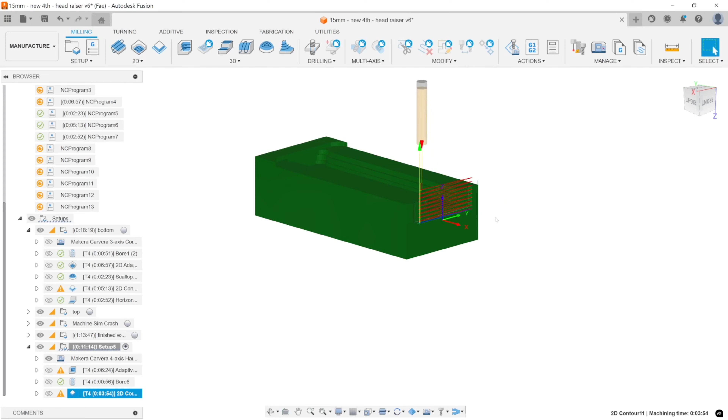Awesome. So, in this particular setup, if I were to modify this where you're going from the sides, I would still keep this side being cut from top and bottom, but then I would do the 2 other sides as just finishing from 90 degrees and then 270 degrees. Gotcha. All right.

So we've got that. I'm going to duplicate this toolpath really quick with a Control D, because we have roughed out most of the parts of this model now. The only thing we haven't roughed out is the tab.

If I was doing this in multiple operations, I would do all of the heavy roughing, roughing out this pocket, roughing out all of the 4 sides, then I would go back and rough out the tab.

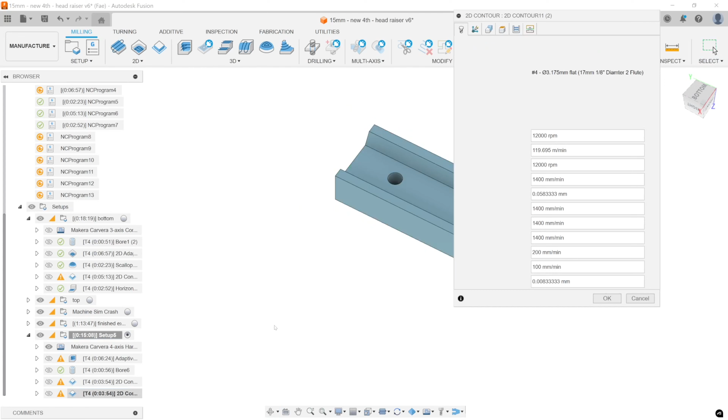The easiest way to do the tab is to go into the geometry, make a new open chain selection of this face here. And then we're going to lengthen it out a bit so it goes past the end of the model.

I'm going to add... 3 millimeters on either, let's do 5. I'm going to add 5 millimeters on either side.

So what happens, again, we've got our ramp from earlier with our 1.5 degree ramp, and we have our roughing passes with our step down. You don't necessarily need the roughing passes with the step down with this type of ramp, but it's good to keep them for a nicer finish. And our heights are, we're going just beneath the surface.

So it'll come in and create a nice happy little slot here.

When we do this from the other side, we're going to go in, leave another smaller slot, and then as the final operation, thin out the slot.

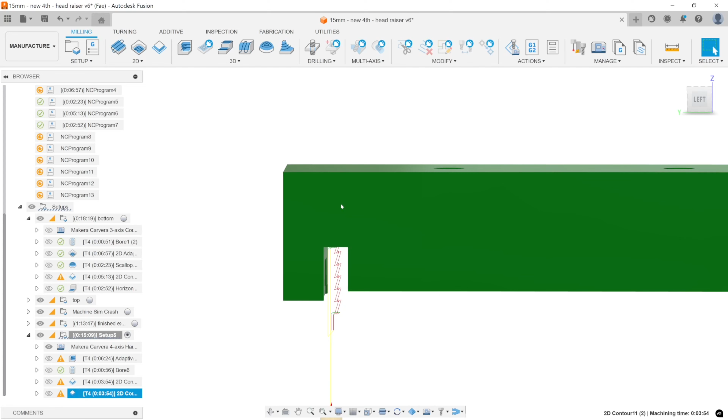I'll explain why when we do a few of the operations on the other side, but we're not going to repeat all of the operations on the other side.

So we've got to the point where we're ready to finish. We did our adaptive to rough things out, we did our bore to get the holes, 2D contour to clean up this face, 2D contour to rough in the slot while still maintaining a good amount of material.

And then for finishing, I want to finish these flat faces first, mostly because this corner here goes down into that flat face.

So if I want to finish the flat faces, I'm going to use the 3D toolpath flat. So I've made a flat, I've selected my tool, hit OK and see what it does. And honestly, in this particular instance, it's doing pretty good.

I'm going to start off with clicking machine over holes. That will make sure that when it's doing the flat on the bottom, it just goes straight over where your two bores are. That's a nice feature to add in, because if you don't do that, there might be a small amount of flashing around that hole, or it might try to toolpath around that hole, which can be kind of annoying.

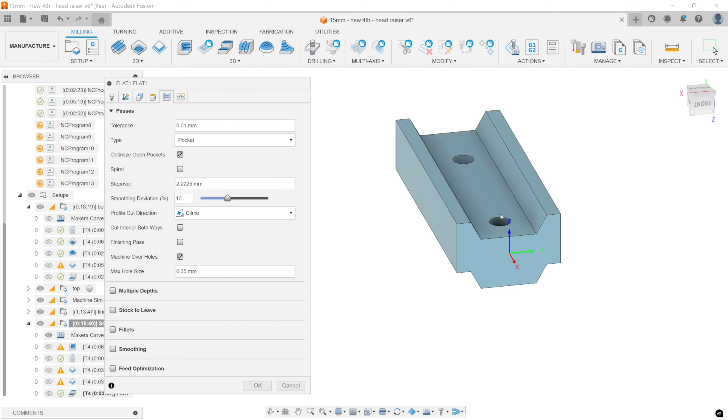So if you see with the stock, I'm going to turn things, grab this and highlight this edge. You can see that the areas that are scalloped are outside the face, so we don't need to worry about them.

So it's cleaned up this edge, it's cleaned up this edge. We have a little bit of flashing that's sticking up. We'll take care of that with our finishing pass on this flat face. But that covers cleaning up those different edges. And you see earlier it was moving around these holes, and now it's going straight over them. It's quicker, it's more efficient, and it leaves a better finish. When you get done, there'll be a slight striping pattern across the bottom instead of a chaotic mess.

Then let's talk about finishing the last face that's going to happen in this particular part, and that's these angled faces. There are a number of ways of doing this. The way that you'd want, which is to grab either a scallop or a contour toolpath, 3D scallop or 3D contour. I'm going to use the 3D scallop, or the 3D contour.

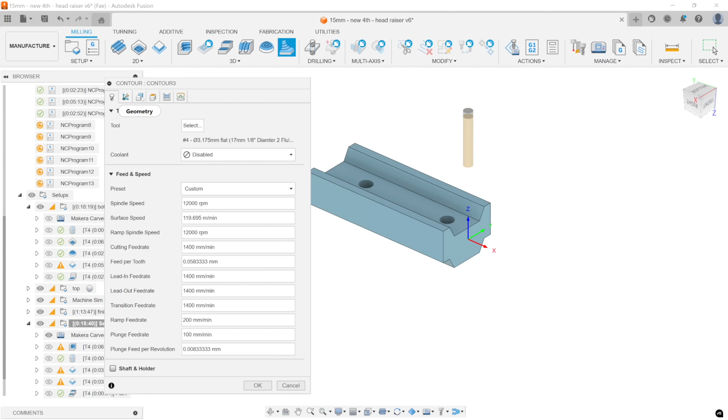In the geometry tab, switch to selection. No, not silhouette, selection. Thank you. Grab those two faces. And then I'm going to add a couple of different features.

I'm going to switch to tool center, on boundary is fine. We don't need to worry about contact boundary because we're using a flat tool right now. And the rest of this is fine.

This isn't necessarily the way I would do it, so I'm just going to show you what it looks like at its base level. In the passes tab, I need to set the maximum step down to like 0.2. So when you're doing a contour, this is the stair stepping that you get.

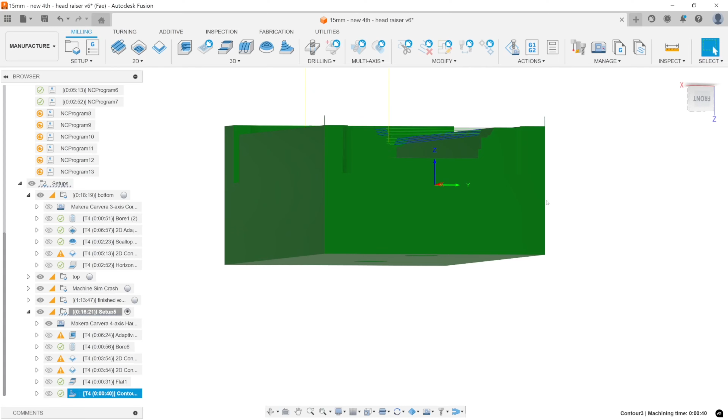So you see it's got a stair step. If I shut off the toolpath and get real close up to the part, anytime you use a flat end mill doing a contour like this, you're always going to get a stair stepped pattern. You can run your fingernail over it, it makes a lovely noise.

An alternative to using a flat bottomed end mill is if you instead go into your toolpath and select a different type of tool. I'm going to grab a ball end mill, ignoring feeds and speeds real quick. So I've got a ball end mill.

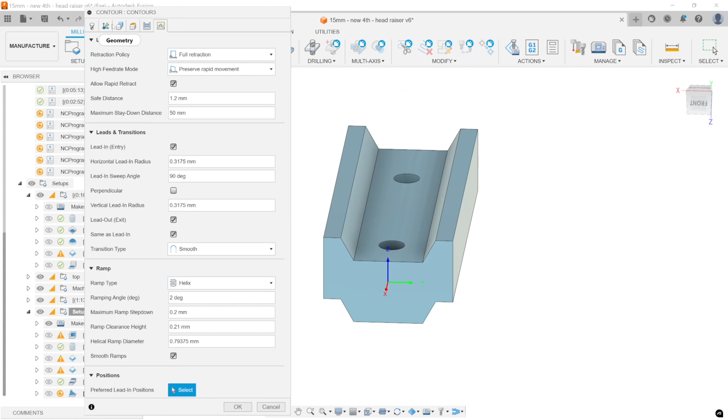It's all of the same selections. However, I am going to go into geometry and turn on contact point boundary. It's not super important for this because it is not an overhang, but anytime I'm using a ball end mill on a slanted surface, I like turning contact point boundary on. If you hover over it, it gives you a little bit of an informational dump about what's going on with the tool, on why it works and why it doesn't work. More or less, it just makes a nicer toolpath with ball end mills to have contact point boundary on.

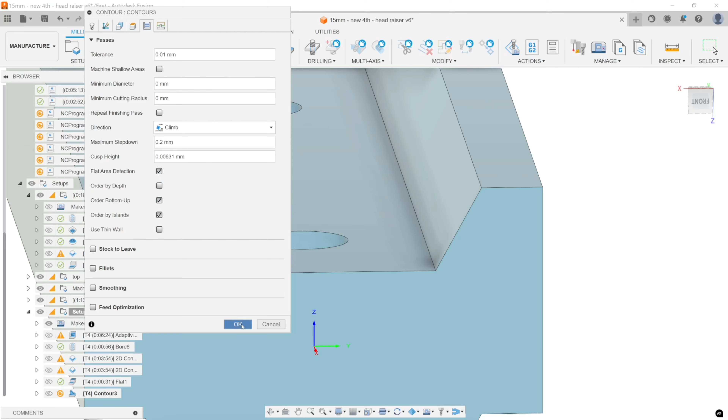The other option I'm going to change is in the passes tab. Since I'm using a ball end mill, I don't want to be cutting with the bottom of my ball end mill, so I'm going to order from bottom up instead of from top down. Because at the bottom of an end mill, it's basically like 0 RPM, right? It's the worst point of the tool. But if you pop into the simulation, you can see it is cutting with the side of the ball of the end mill, not the very bottom. As you're going from the bottom up, the bottom is almost always clear of material, except at the very, very bottom of the part.

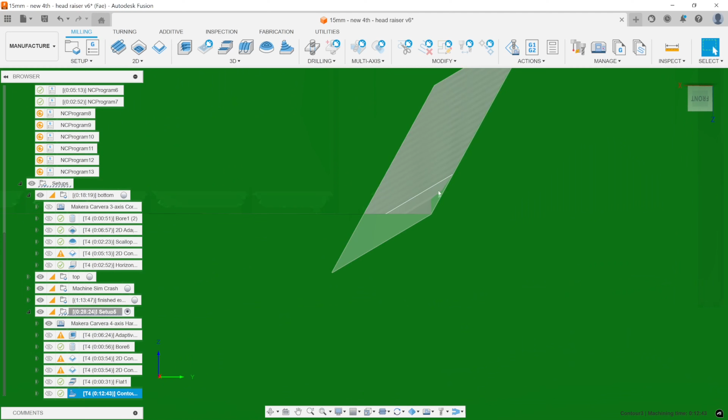So that's why I choose that. The other thing that comes up as a problem with this particular toolpath is since we're using a ball, we cannot get into this sharp corner. That might not be a big deal, depending on if you have large chamfers on the mating part that this goes into, if the chamfer is large enough to miss this section of the part. So if this here was mating into a part which looked like this, having the ball end mill not hit the corner is no big deal. If it was a tighter corner, it would be a problem. Anytime you have a sharp corner transition in any material, you want to relieve one or both sides.

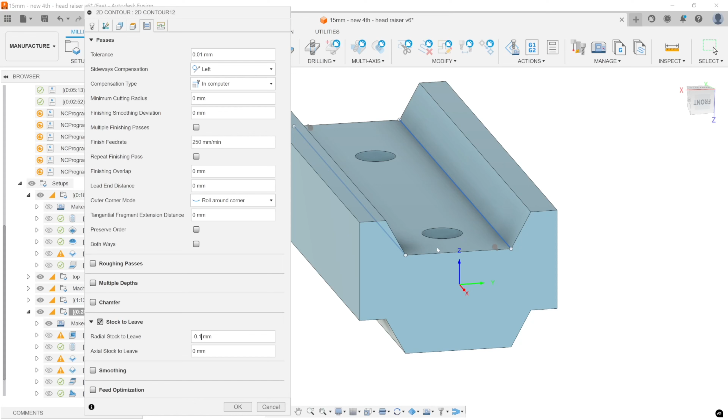The way I would probably do it in this case would be to grab a 2D contour on those two faces, those two edges there, go into the passes, and in the stock to leave, set no axial stock to leave, but I'm going to add a -0.1 radial stock to leave. Radial is side to side, axial is up and down, and that will actually cut into where the model is designed. However, it also helps get rid of that little section there and relieve it so that the corners fit together well.

I'm going to go... the inner corners. They always get you. Yep. Okay.

So that's one way of doing it. You could also relieve a channel into the part here, if you cut lower on either side here before doing that slanted surface, then the ball end mill would be able to go up that entire surface.

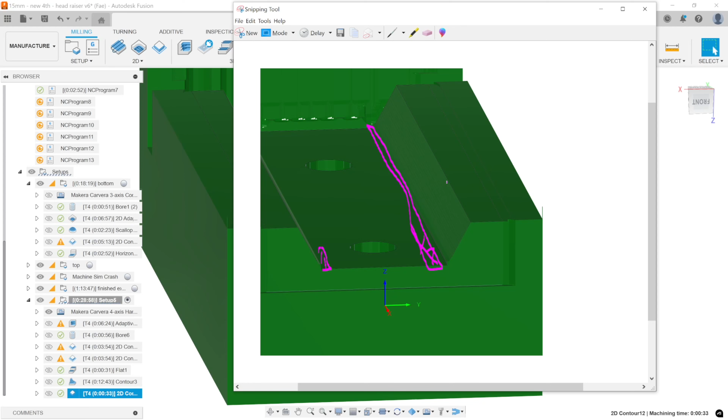However, we're working with a 4-axis machine, and we should have the clearance to do it a different way, I think. So we're going to try the earlier suggestion of rotating the part in the setup.

So I'm just going to duplicate the setup that's already done. So we've got setup 5, number 2. Go in here and I'm going to delete everything out of that setup and start editing it. So I made a duplicate just so that I had all of my stock settings and all of my work origin settings correct.

In this particular case, I've got my z-axis plane and x-axis. I'm going to change my z-axis plane to the face of that part, and it rotates it to match. So I hit OK. Oh, that's brilliant, it changed my orientation.

So you can see, and we're going to see if we can get away with this. The angle might not be good enough to do it, but we'll try. Without doing maths, is there anywhere in Fusion where it tells you what the angle is now?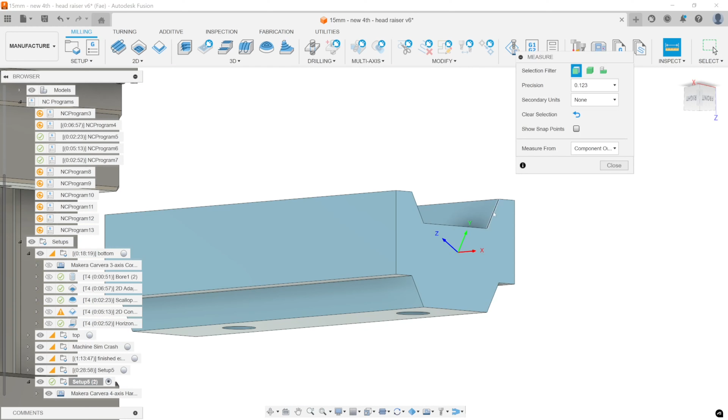Inspect, grab 119.4. I'm very familiar with that same feature in Onshape, I use it all the time. I've never once used it in Fusion.

Yeah, I'm going to try doing, we'll just see what happens if I grab flat. Hit OK. Also very true. So I'm going to go back into setup from here,

turn on accessibility analysis. It says that it can probably reach the area. This accessibility analysis shows what is visible from above, assuming an end mill of 0 diameter, right? Yeah, but also the edge of the end mill should be able to reach the red part.

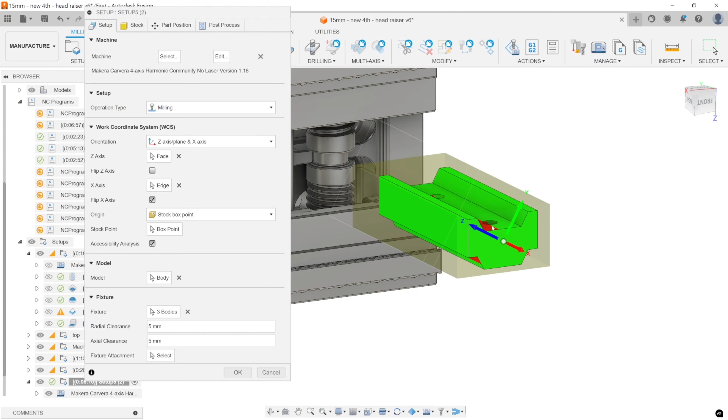Let me shut off accessibility analysis real quick and go into stock, turn on continue rest machining so we can see what's happening. So I come in here and

simulate. Oh, that was a ball end mill. I need to switch the tool back to the flat end mill. Yeah.

Now it's all a 90-degree flat surface. So now it's a 90-degree flat surface. And do a quick simulate. You can see it going in. Oh, it's going too far.

So we'll have to bound the flat in the geometry tab, machining boundary selection, grab the face, and tool outside boundary. I noticed it was going too far, it was cutting stock over here, so I just want to make it a smaller selection.

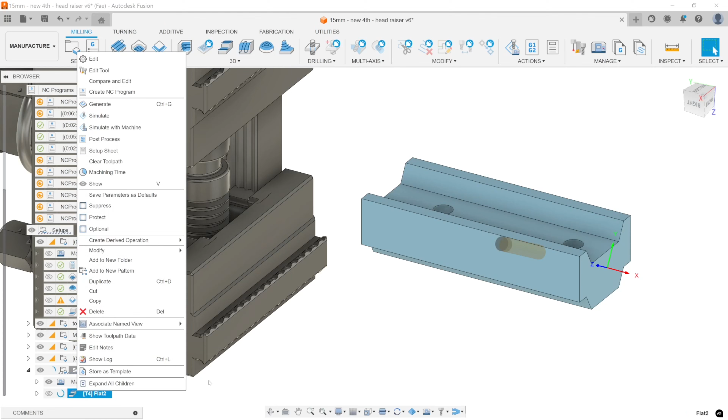Again, 3D operations, you were saying where not to cut. And give it a second to finish. Simulate with the machine. Play.

What are you doing? Okay, there's a couple of headaches going on with the exact nature of the toolpath simulation, and this is why we simulate with the machine. It looks like we have an issue with the stock that's sticking up here.

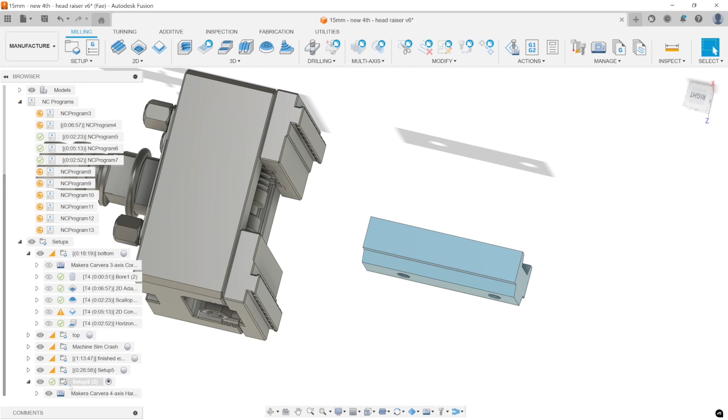Various different ways you could deal with this. You know it's there, you could cut that section down. Or, Matt in the chat made a suggestion, which I think is a great suggestion, where we're going to go back into this setup. What's the best way to do this?

I'm going to create myself a quick manufacturing plane. So I'm going to go into the design section and make a plane at angle. Nope. Yeah, no, I do not want a plane at angle.

I do. Oh, the heck with this. I'm going to create a sketch, project this line, draw a line 90 degrees either direction. So now I have a line that is perpendicular to this face.

And then I can construct a plane. I want two edges, this edge and that edge.

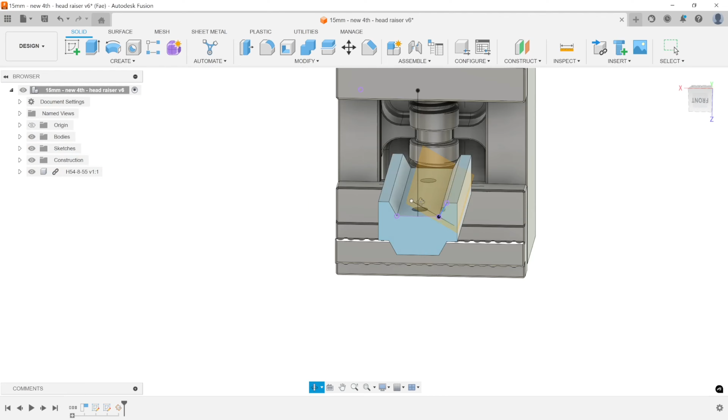Okay, so I went through and I made a plane that is 90 degrees to the face that I was working at, so that when I go back into the Manufacture tab and into my setup, my z-axis plane and x-axis, I can instead select that plane, which will once again rotate everything, and you have to

get your mind wrapped around things. So I need to flip the z-axis there, and once again rotate weirdly. So now we can mill this with the side of the cutter instead of with the bottom of the cutter.

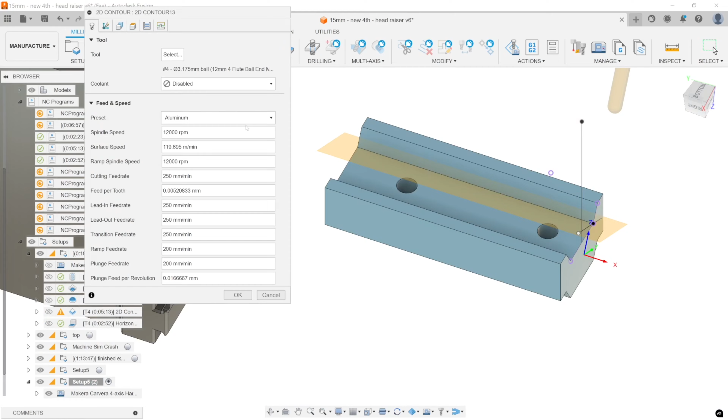So you'd be able to go into 2D contour, grab the flat end mill, select geometry, grab that surface. This is a finishing pass, so

shut off rest machining this time. Yeah, turning on rest machining was a mistake. So then you can simulate with the machine, see if it crashes anything.

You can see my verification showed up and it's all good. And I think I may have gotten my angle slightly incorrect, but you can spend a little bit more time fixing this plane so that the angles are all correct. But you could come down from the top, do a contour along that path.

There's so much they need to keep in your mind, though. Yeah. It's one of the reasons that there aren't a lot of really good automatic machining setups yet, is there are so many variables and so many different ways to do things.

Like, this is a very simple part, and I just showed you how to do one feature on it 3 different ways, and each of them have pros and cons. One of them, you don't have to rotate the part. One of them, you're working with the bottom of the end mill. One of them, you're working with the side of the end mill. The finishes between bottom and side of end mills can be different.

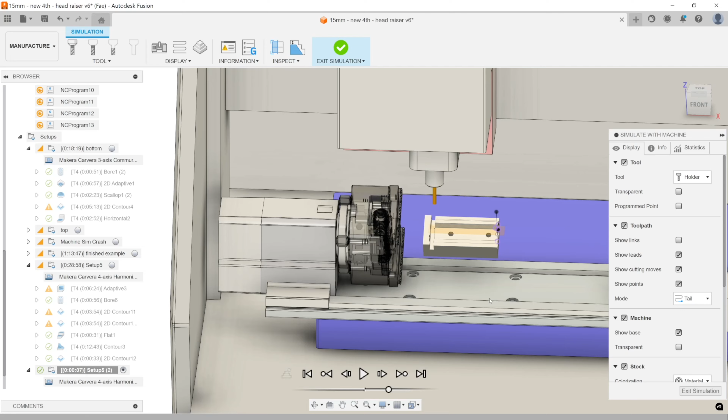It's wild. All right, so the last thing I want to do, if you were to go through and do this whole setup again on the opposite side of the part, come in, flip the z-axis so that you do all of the same operations to get all of the milling parts done. The last thing I want to talk about is the tab.

Which operation is the tab? I should have named it. Operation 4.

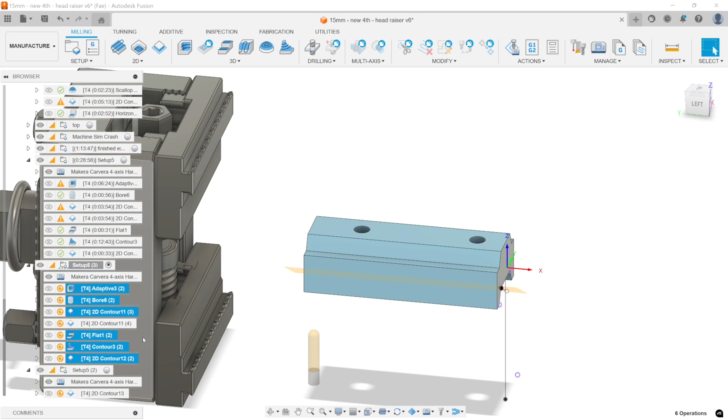Alright, so when I'm doing this part, when I'm doing the opposite side, say I've done all of my roughing, all of the things, I'm going back to where the contour happens. I'm going to go into my heights, select a surface here. It'll go 2 millimeters below that. So now between this one and the previous one, 2, 3, 4.

Simulate. I selected 2 different operations between 2 different setups on the left-hand side, and then right-clicked and hit simulate, and it will simulate both of them on the same part. When you're all done with your part, you can simulate all of your setups at once, and it'll show you your final part, which is pretty cool.

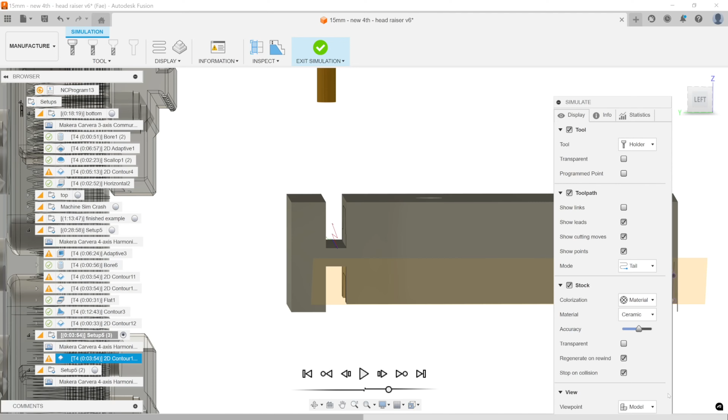So I'm actually going to slightly modify this to heights 1. I was thinking you might need to model the tab, but this way you just keep simulating until you're happy with what you see. Yeah. So what I would do is I would leave a relatively beefy tab for until the very end. This might be a little too thin, honestly, for side 2. I just wanted to get...

You could probably reduce these both down to 0.5 millimeter instead of the 2 millimeters that they are beneath those surfaces. That just allows you to go through and do any chamfering that you want to do on any of these edges.

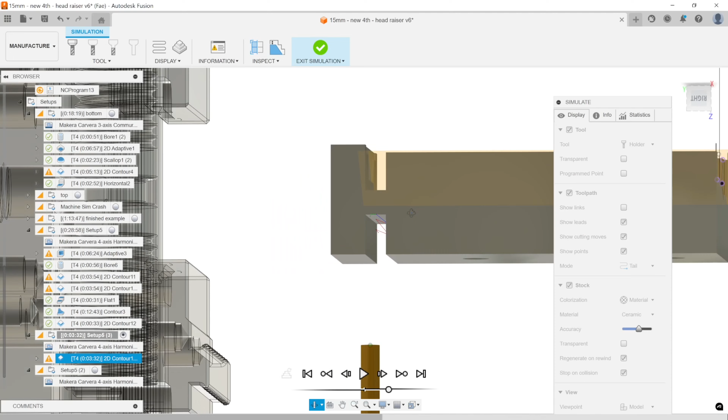But you get to the point, you've done all of your finishing, you have a relatively beefy tab between the 2 of them. I would then cut the tab down to 0.5 millimeter thick from one side or the other. 0.5 millimeter of aluminum at this width is enough that you can break it and then file it off.

So from a 10,000 foot perspective, you go through, you do side 1 with the tab setup, however deep this goes. You do side 2 roughing, however deep side 2 roughing goes. And so if I were to do this part, I would do the 2 90-degree sides first. I would clean this face and this face up first, because they're quick roughing operations. They're not the most important dimensions, but it's good to get that material out of the way for everything else that's going on.

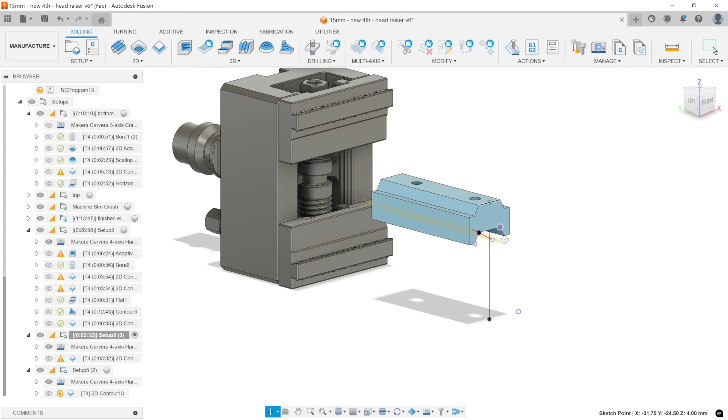And then I would rough side 1 and side 2, including the tabs. Once the roughing and the tabs are done, I would go through finish side 1 and side 2. At this point, we still have a 2-3 millimeter thick tab. Do any of the chamfering that you need to do.

And then the last step would be from side 1, say, do another contour at the very end that cuts to 0.5 millimeter, 0.2 millimeters. You do it from one side because we are in open space and we're going to take advantage of some physics that are going on.

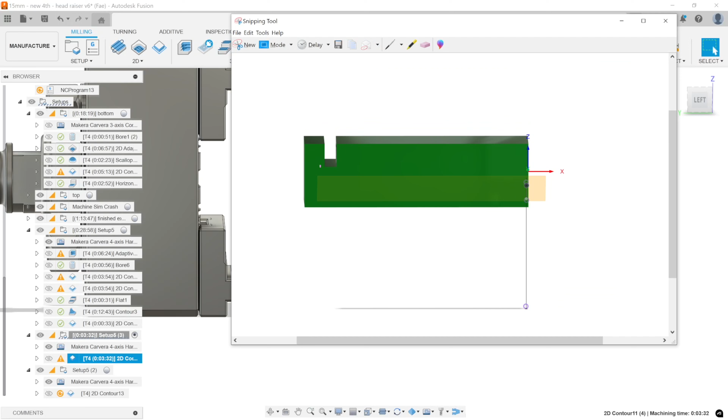So say we've got our tab coming up to there and we cut down, so it's a very, very thin section here. Any flex that happens when you're cutting from one side like this is going to create a torque moment, and it's going to bend the part down on this side, which will open that slot up. That way you're not screwing up any of the faces of your finished part. It'll just sort of slump over a little bit.

You don't want to cut all the way through, because you could then, when you get to the very last section, it could kick the part and that could leave some scratches on it. You leave a very thin tab, just a couple of tenths of a millimeter, and then go in, work it up and down to material fatigue and break the part, or cut it with a saw and file and sand. And that's the part. Brilliant.